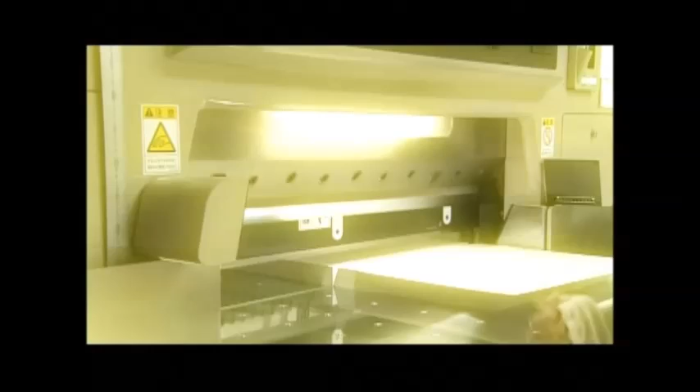Our food would taste dramatically better. Productivity in our factories would surge as we could cut many materials at once. Ultra-sharp scalpels would leave thinner scars.

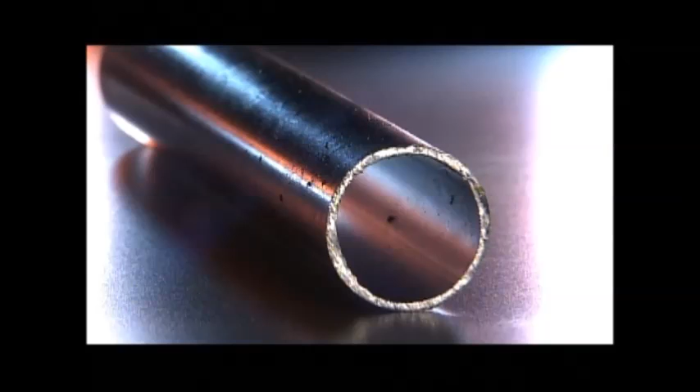But there's one thing that's always been considered impossible to cut with a blade. That's right, iron. A blade that instantly slices through iron. A dream blade like that would revolutionize manufacturing.

One craftsman has accepted this seemingly impossible challenge. We call him the Fire Master. A top blade manufacturer has too. Let's watch the drama unfold as these men put their professional pride on the line.

Whoa! Supreme Skill.

Welcome to Supreme Skill. Today we introduce two teams who have pursued their vocations to the extreme. One a company, the other a craftsman. They'll compete to show their skill while demonstrating the depth and power of Japanese manufacturing and technology.

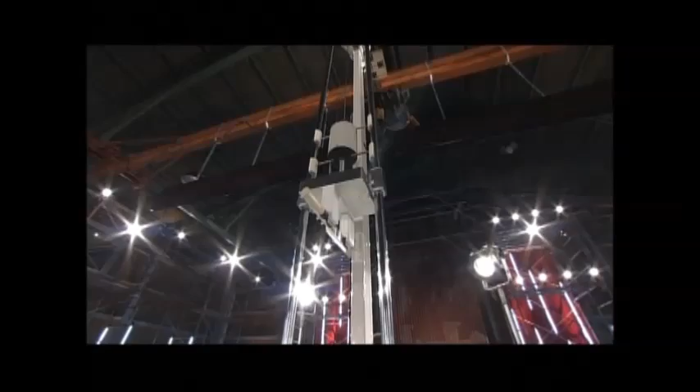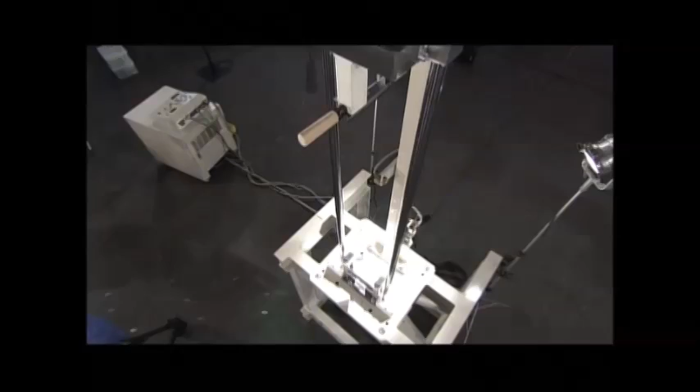And here's their playing field. A guillotine. The blades made by the two teams will be dropped from a height of 1.5 meters onto an iron pipe and the cuts compared. The height and weight are kept constant to ensure fairness. The pipe measures 2.2 centimeters in diameter with a wall thickness of 1.2 millimeters.

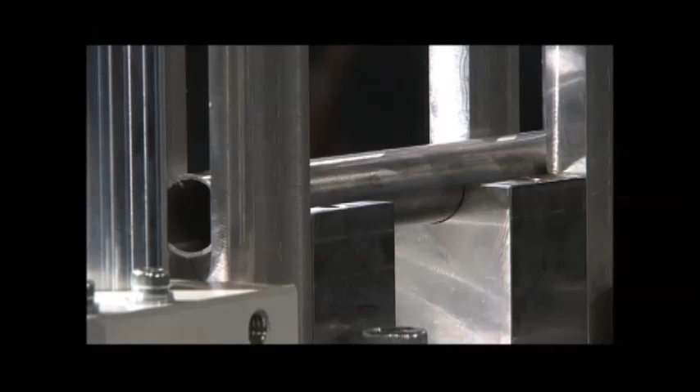The first challenge is cutting the pipe. If both teams succeed, the one that keeps the cut ends closest to round wins.

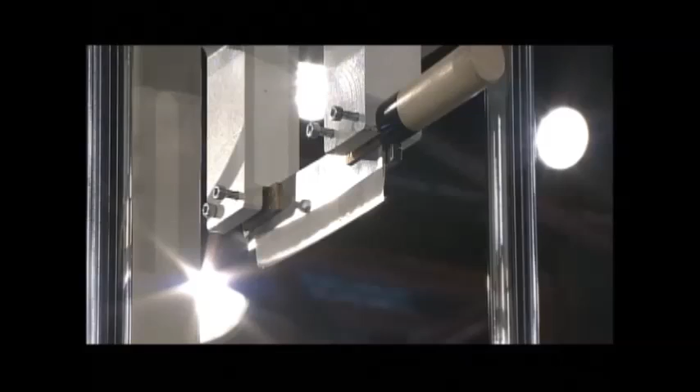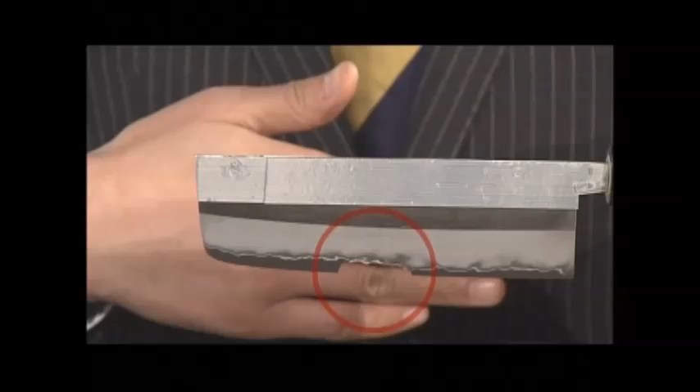To start off, we'll drop an ordinary kitchen knife and see what happens. The pipe only got bent. It's seriously chipped. The blade shattered. That iron pipe is tough.

The blades must be made within 1 month and can't be longer than 25 centimeters or thicker than 1 centimeter. But there are no restrictions on material or shape. Let's see how they do.

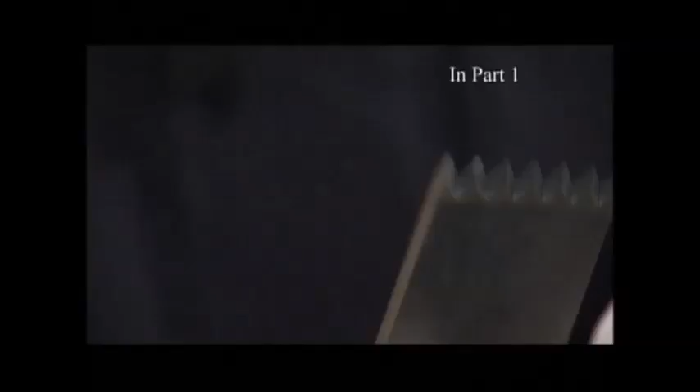Blade manufacturer Fukuda Hamono was founded in 1896. They're fielding a real power team. The company specializes in products for cutting paper. It has the top share of the Japanese market, selling blades that can cut tens of thousands of magazines without getting dull.

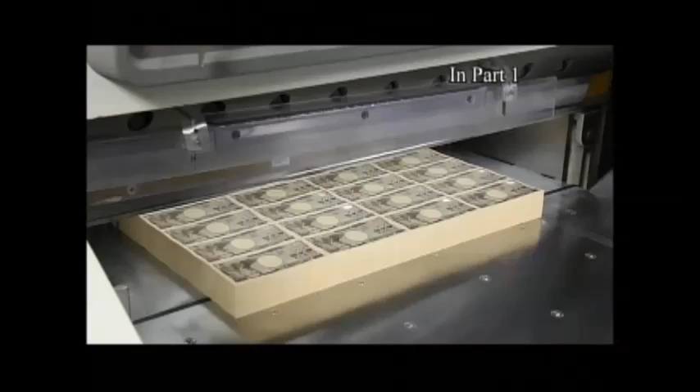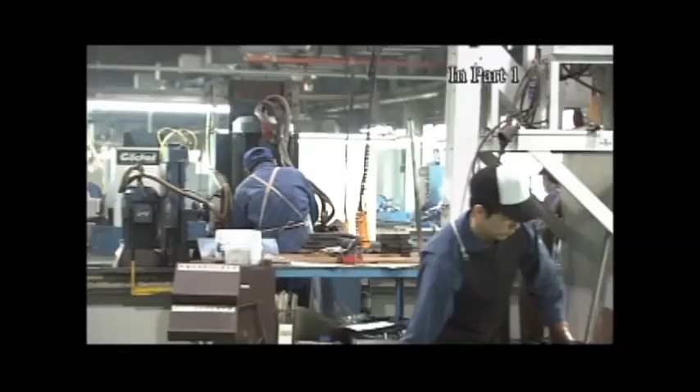Their blades are also famous for their precision, which is why they're used to cut paper currency. The company accepted the iron pipe challenge because they believe it might lead to new products.

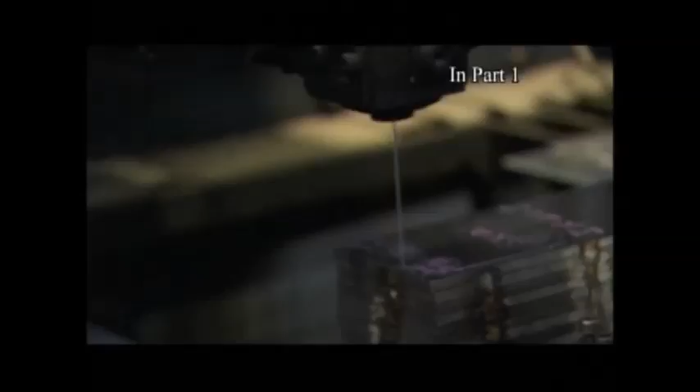For their material, they chose the same steel they use in their industrial blades. In part 1, we saw them manufacture a finely honed blade and test it on the pipe using an experimental guillotine they built themselves. Here we go.

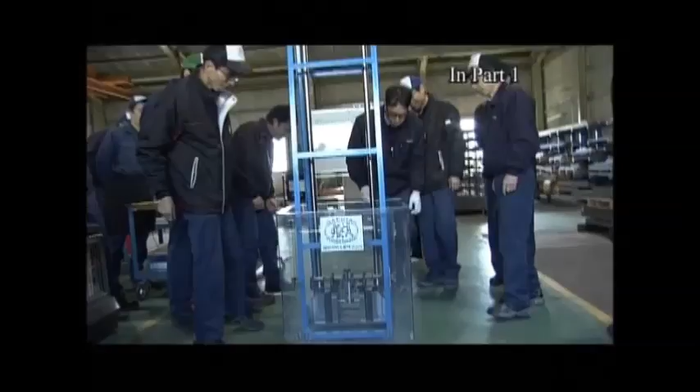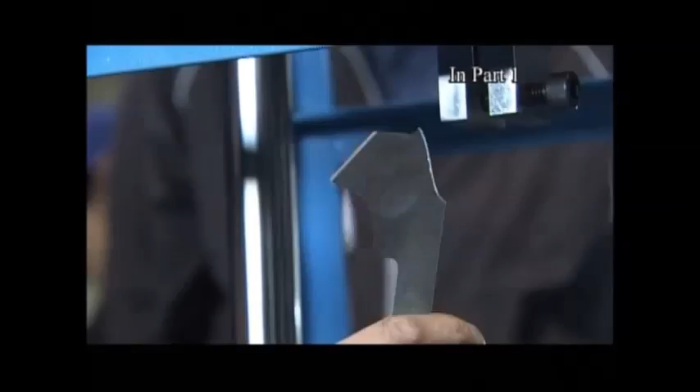All right. Oh, no good. The blade broke. They'd made the blade just a millimeter thick to bite into the pipe, but that made it too brittle. Still, it did pierce a small hole.

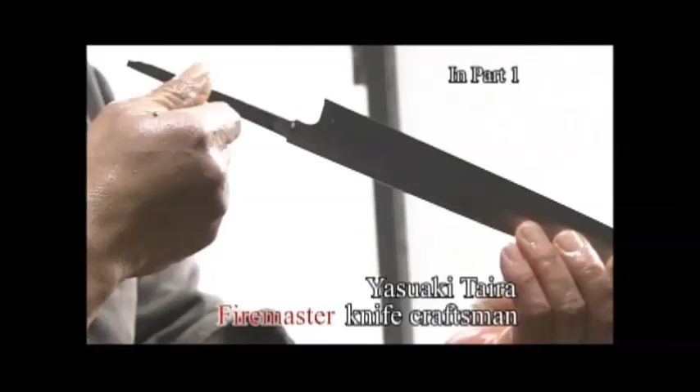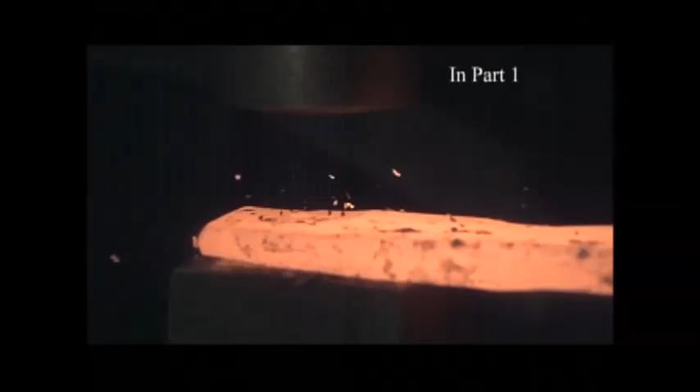Meanwhile, the master knife craftsman Yasuaki Taira was also at work. In part 1, he demonstrated superb traditional forging techniques that produced a hard yet flexible blade. He took on the iron pipe challenge because he thought it might help him develop even sharper knives.

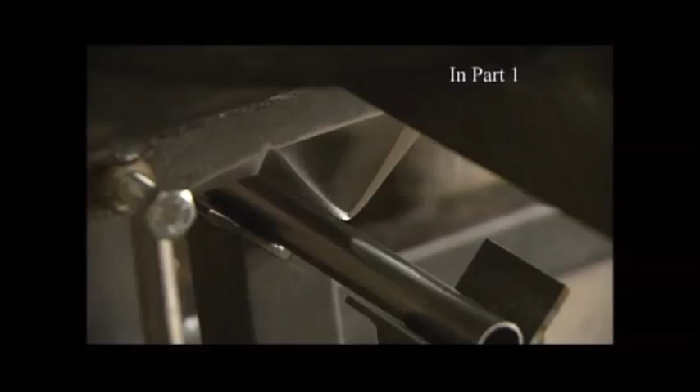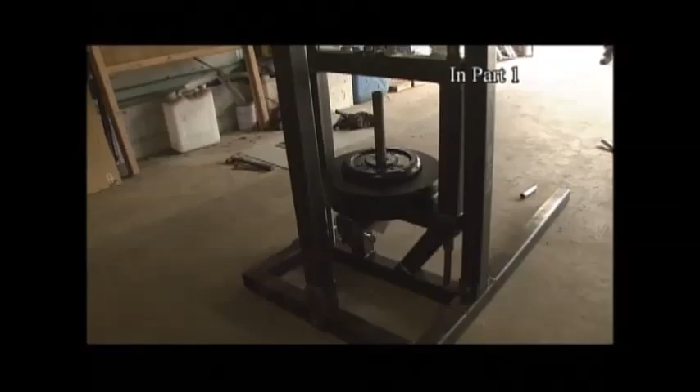He comes up with the same basic design as his power team opponents, a sharp protrusion meant to pierce the pipe. The result? Please. Cut it. Excellent. Yasuaki Taira succeeds in cutting the pipe.

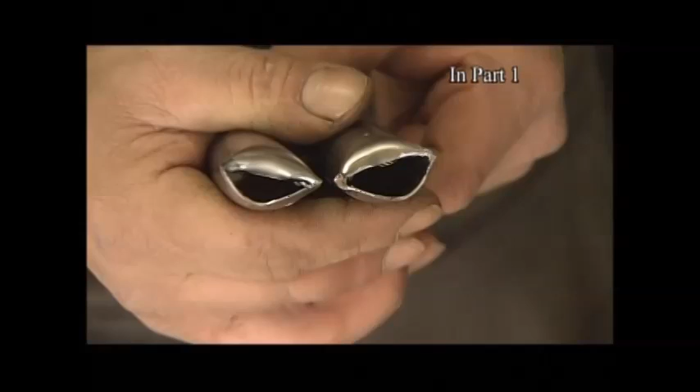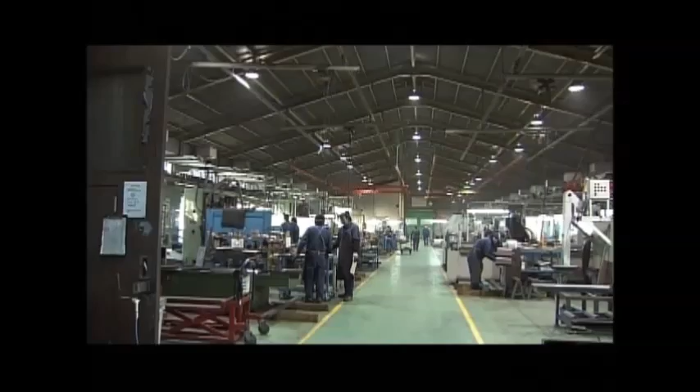Meanwhile, the power team adopts a new approach. They fundamentally rethink their grinding method. Their goal is to achieve an even sharper edge.

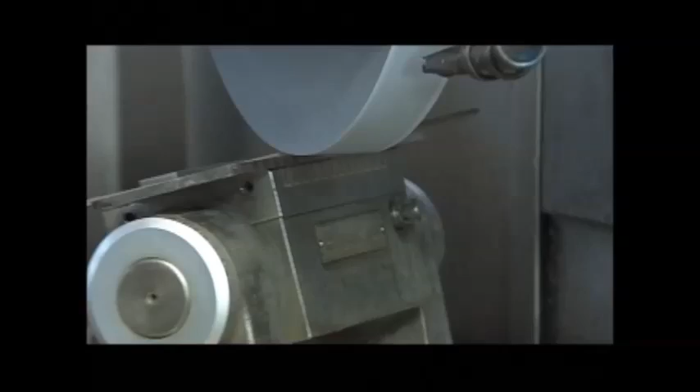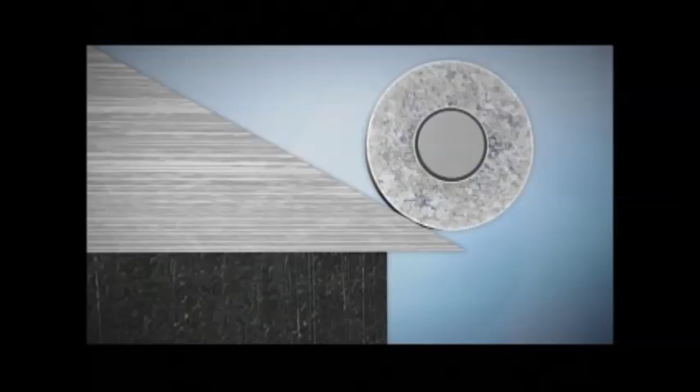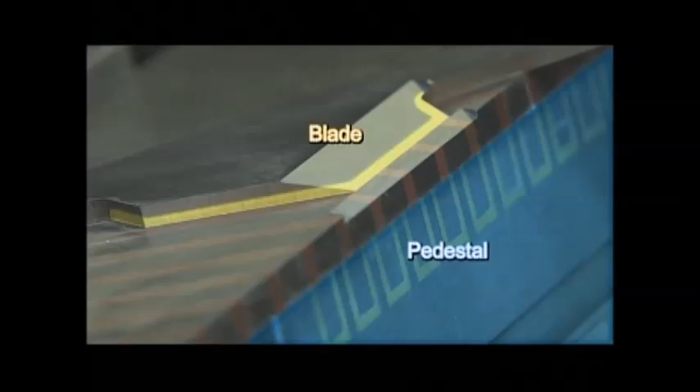Usually, the blade protrudes slightly during grinding so that the grindstone doesn't damage the pedestal. However, that means that the grindstone exerts pressure that slightly deforms the blade's edge. The power team decides to place a specially made metal bar between the blade and the pedestal when grinding.

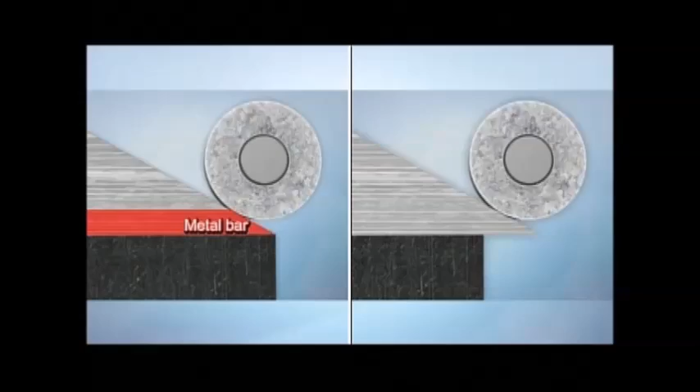By grinding both the blade and the bar, the edge of the blade can be ground without deformation. This special technique, called tomoken in Japanese, results in a sharper blade. Ground along with the blade, the metal bar keeps the blade edge straight. A microscopic view shows the difference between a conventional and a tomoken blade. The top one is slightly bent. The bottom one maintains a clean, straight line all the way to the edge.

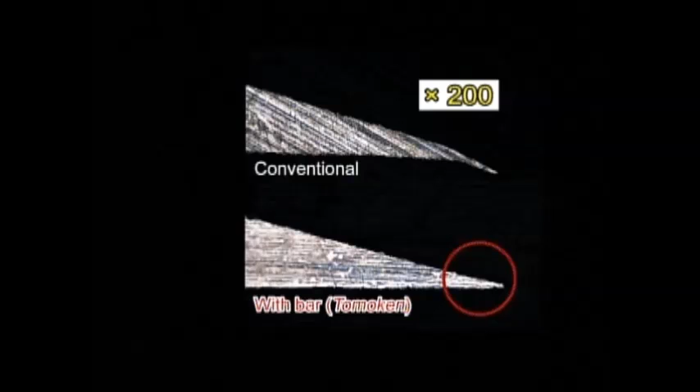The blade is sharpened to a tolerance of 1/1000th of a millimeter. Supreme skill.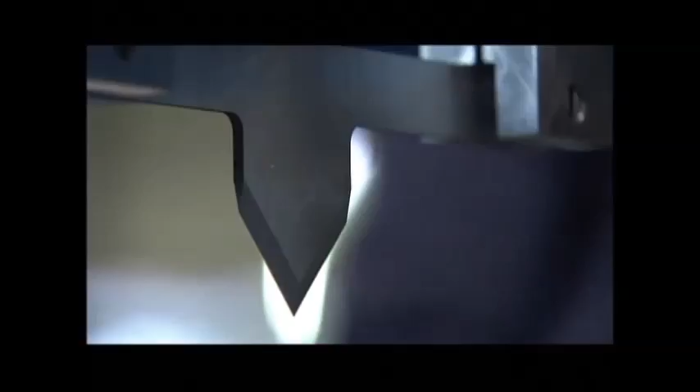They try it out. How will it do? Ready? Here we go. Oh, I think it worked.

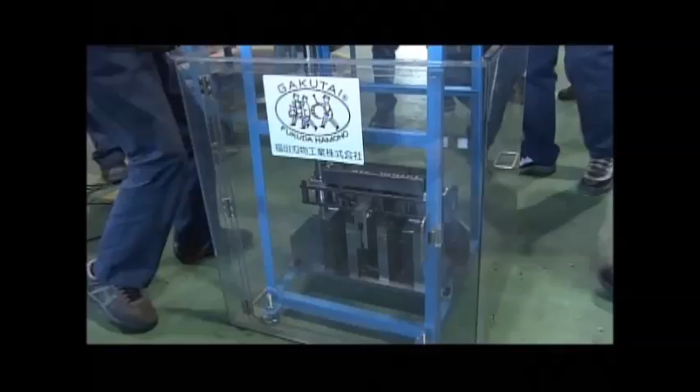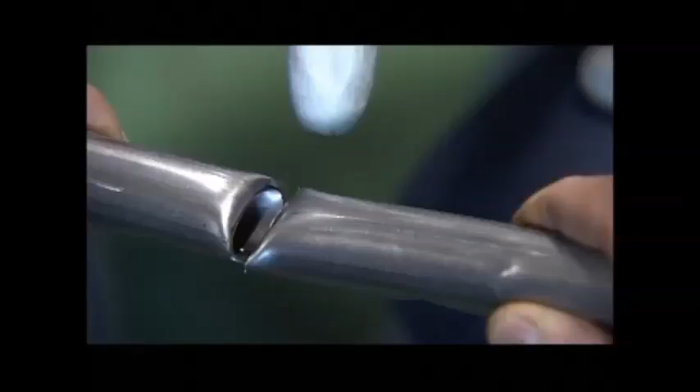The power team has cut the pipe. Finally, we did it. Sending out sparks, the blade pierced the pipe and finally cut through.

Of course, Keisuke and his team are still not satisfied. We've achieved about 10% of our goal. At least we managed to cut the pipe. But we're professionals. We have to do better. Get to it.

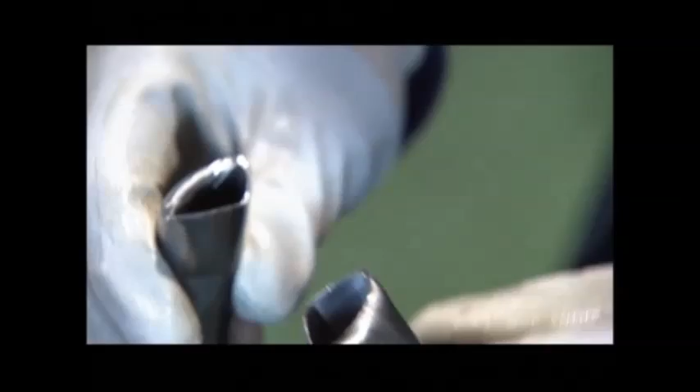Both teams have shown the supreme skill needed to cut the pipe. Their next challenge is finding a way to maintain the pipe's roundness. As the blade cuts through, it exerts pressure that deforms the pipe. Can they overcome this problem?

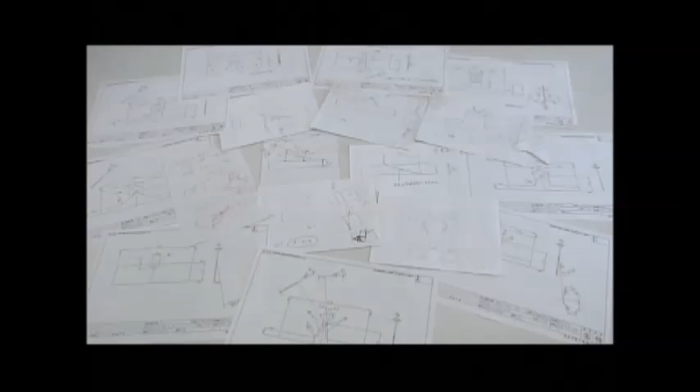All of the employees at Fukuda Hamono are invited to submit ideas. We've got lots of ideas. We'll try as many as we can. Throughout its long history, Fukuda Hamono has developed about 48,000 different kinds of blades. The difficult challenge of the iron pipe has ignited their fighting spirit.

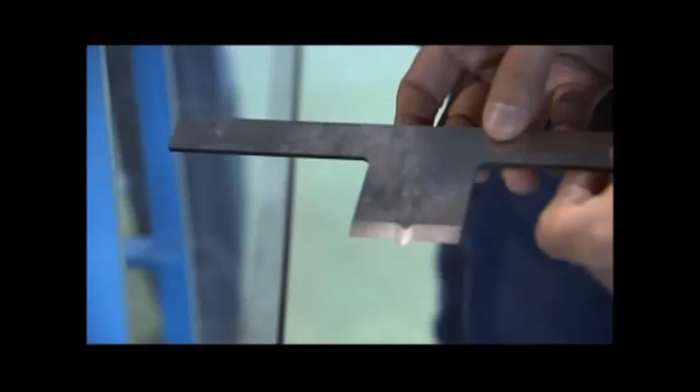They get right to work. This is the first blade they try. It's a thin 3mm blade with a small point designed to open a hole in the pipe before cutting. It's the brainchild of Kazuya Shimomura of the manufacturing division.

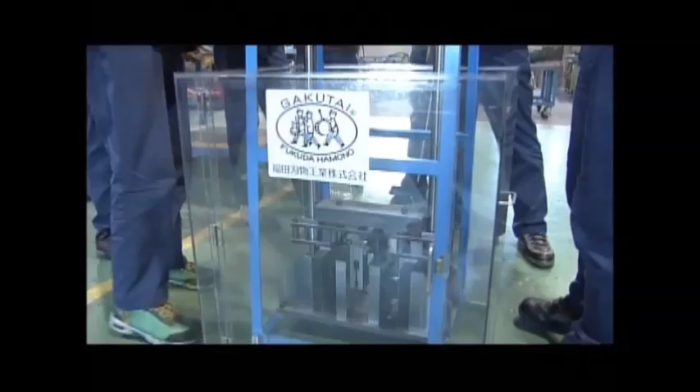Ready, set, go! Well, it's great in its own way. Although it cut through, it also flattened the pipe.

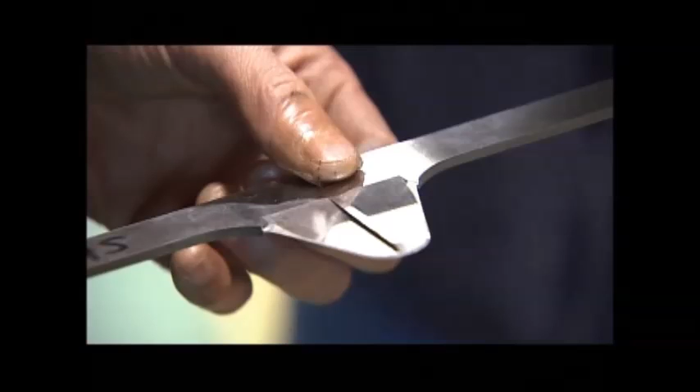Yoshitaka Ueda is in product development. His idea was to make the blade as thin as possible, but with reinforcement down the middle. He hopes that the thinness will minimize the resistance on the pipe.

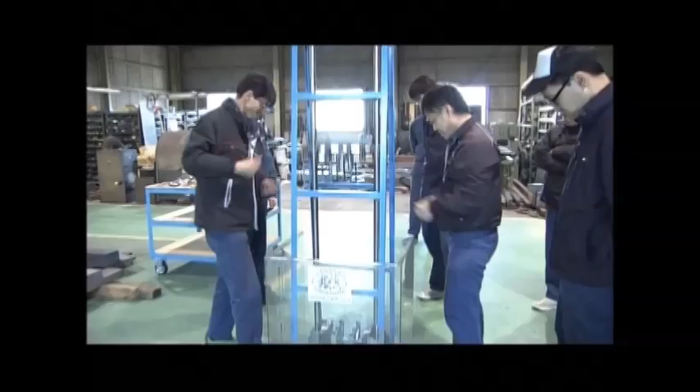Go! The pipe isn't cut all the way through, and—ah, too thin. The thin blade is broken. What's next?

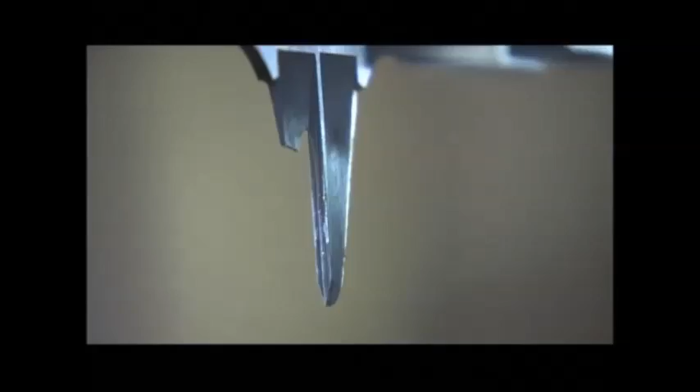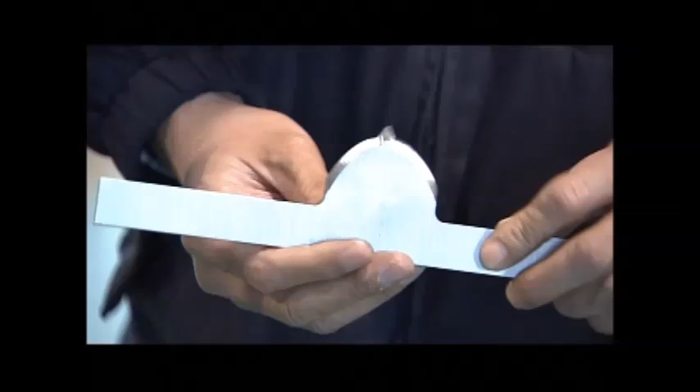The Keisuke Special. Team leader Keisuke Fukuda is the production manager. He's confident that his blade will do the trick. All set. Show them what you've got, Keisuke. Let's do it.

But... that's too bad. Didn't cut it. Too bad for the Keisuke Special.

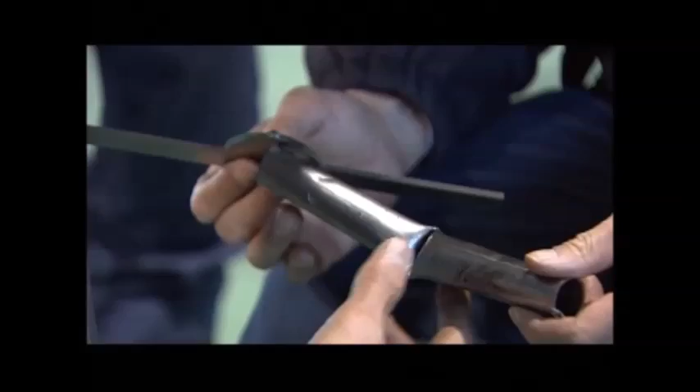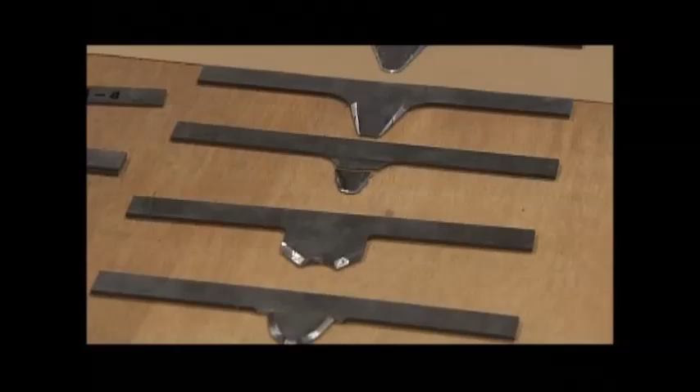The team tries about 30 different designs, but not one of them keeps the cut ends round. We were too optimistic. Not enough progress. We're in trouble.